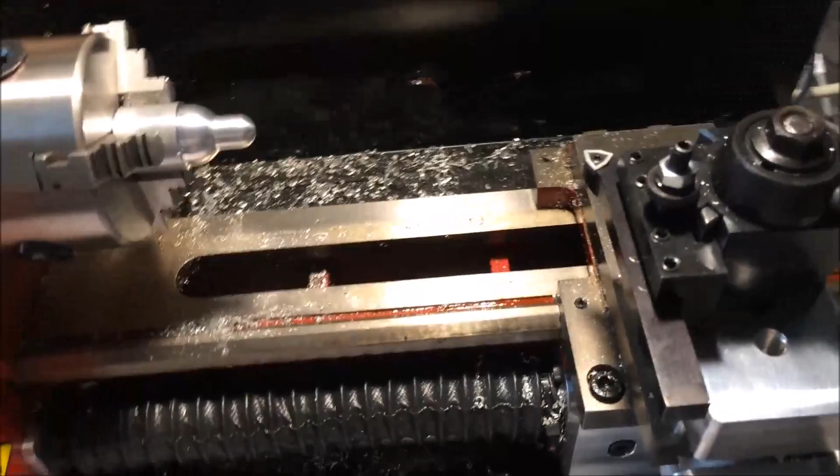Hey there YouTube. I thought I would shoot a quick video talking about how to touch off turning tools with Mach3. So very quickly, it's sort of a multi-step process. The first thing you've got to do obviously is physically load your tool into the holder. The second thing you have to do is find the center height of your tool. So the way I'm going to do that is to take a couple little test cuts here and just make sure the tool's on center.

Then, after that, what I like to do is, my cat is just, yeah, okay, that's okay, buddy, it's good.

After I find center, then the process I like to use, I like to touch off in Z on a common point of reference. So I use the face of the chuck here to touch off all the tools in Z. That way, no matter what I'm running, no matter what's loaded into the chuck, how far it's protruding, I can always touch off on a common point. Then all my tool touch offs are good for every job that I'm going to run. It doesn't matter what I put into the chuck. Those tool offsets, they all work.

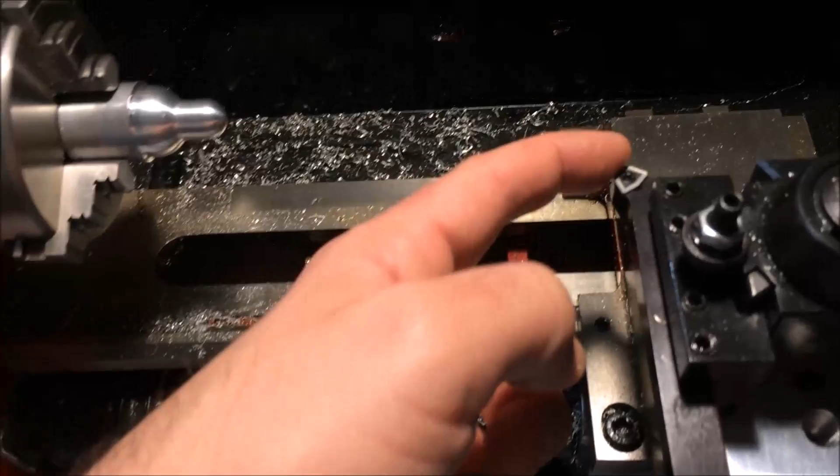X offset, very similar. The values you load into your X offset registers are the position that the axis has to travel to put the tip of the tool on the center line of the machine. So all your X offset registers are just that. It's the distance that the X axis has to position to in order to put the cutting tip on the center line of the machine.

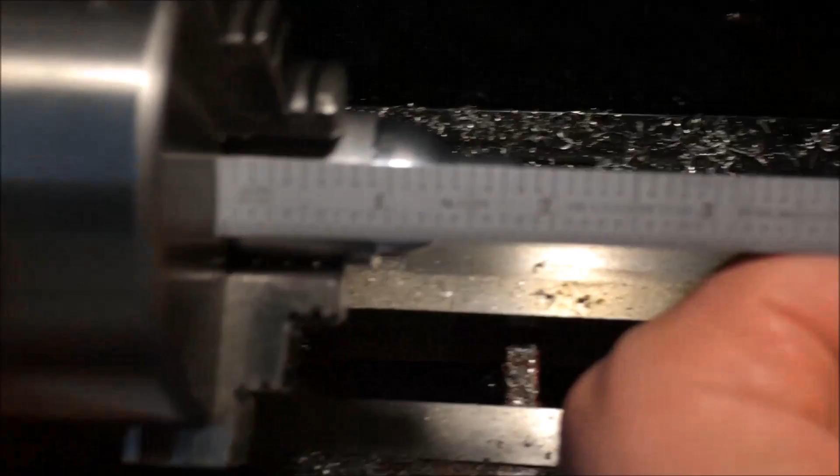Once you've done all that, your work offsets, or your fixture offsets, are really easy. You'll just bring up any tool, activate the offset, touch off the 0 point of your work and just tell it that that's 0. It becomes really super easy. Another way you can do it, if you know all your tools' Z0 is the face of this chuck, you can use the scale. For instance, if you want your 0 point to be 3 inches from the face of that chuck, then you literally can just load 3 inches to the fixture offset. So, long story short, there's a lot of benefits, I think, to touching off a common reference point.

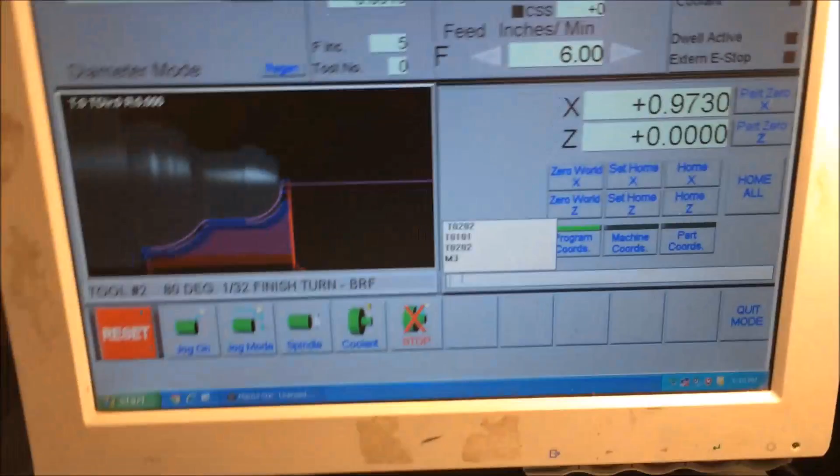So I'm going to go ahead and find the center height of this tool. I'm just going to take a couple quick test cuts, just like you would do on a manual lathe. Okay, so just jog this up there. Just going to fire off an M code here so I can see what my spindle RPM is. So I'm just going to give it an M3 just to tell it the spindle's on. So now I can see the spindle RPM, that's good. Going to jump into the jog wheel here, and I am going to slow down the feed rate to about 30%. So now everything's going to move nice and slow. So I'm just going to

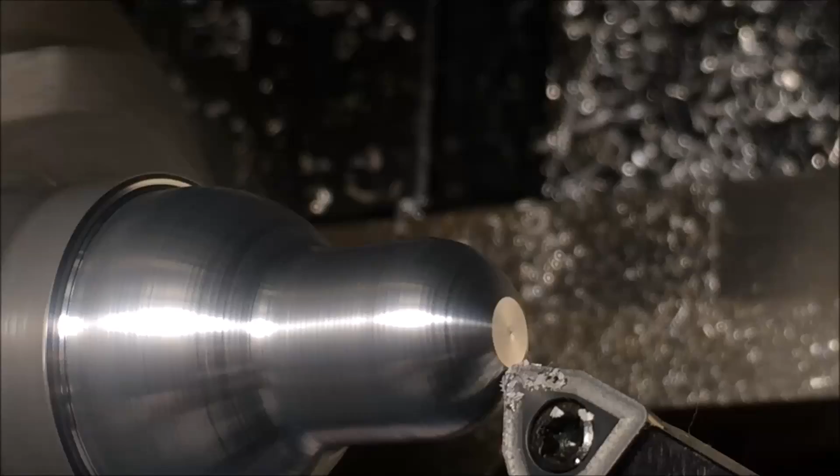I think my tool's a little bit above center, so I'm just going to adjust that and take another cut. Okay, so I think I have this tool fairly well placed on center, so I'm just going to take a little cut with it. Yep, that's pretty good. That tool's on center, and yeah, that'll work. Alright, now that the tool is on center, we can start the touch off process.

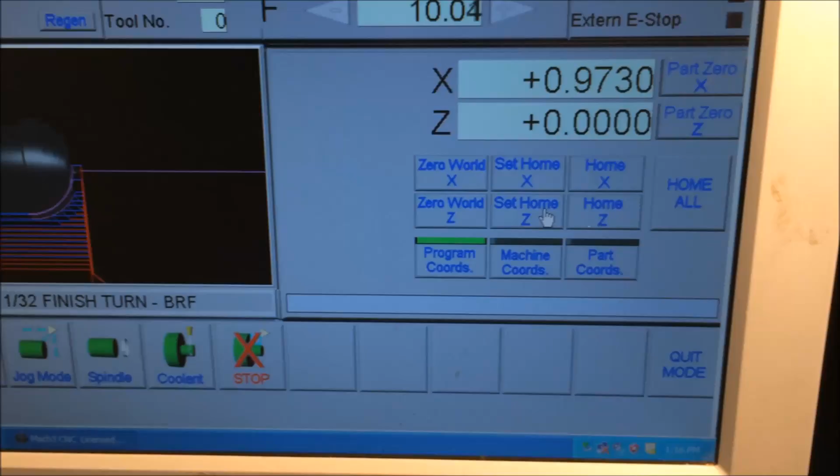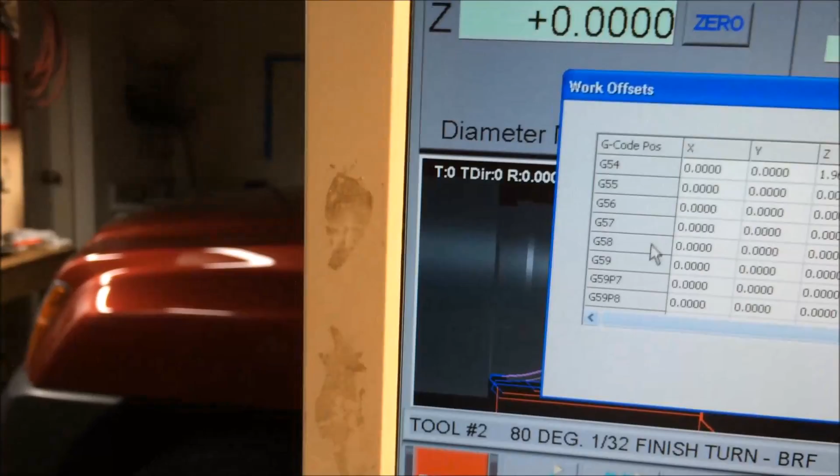So for good measure, I'm going to rehome my machine in X and Z, and make sure we're where we need to be to reference out all the axes. Alright, great. So we are at machine position 0, 0. So what I like to do is use G59 as a fixture offset for touching off, and G59 has no values loaded into it. So when I activate G59, it's basically going to be the machine coordinate system.

So what you have to do is first you need to let Mach know that G59 is active, and then you need to tell it which tool you're touching off. So I'm going to touch off T0202.

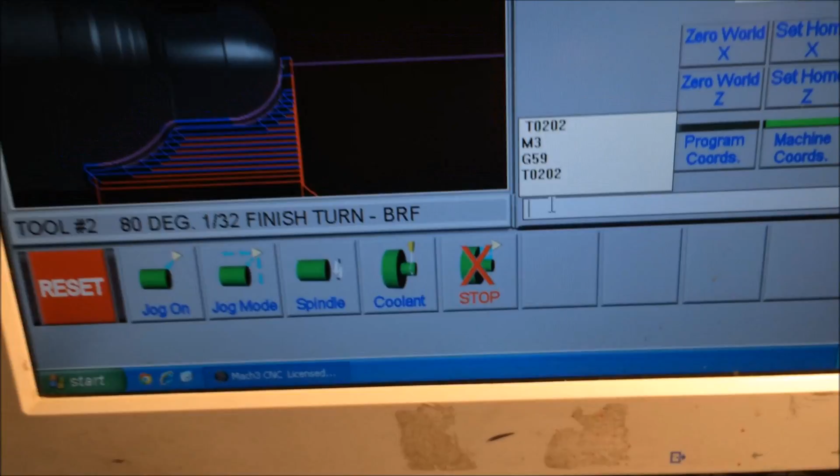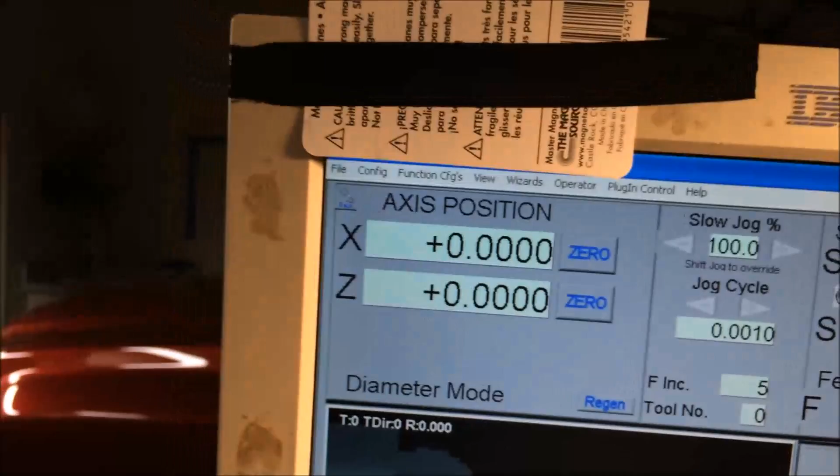So G59 is active and offset 2 is active, and when I go to program coordinate system, it still says 0, 0 because G59 has no values loaded into it and the tool offset has no values loaded into it. So that's right where you need to be. So now we're going to quit mode, and we're going to go to the tool table, and we'll get started.

One quick point that I forgot to mention: before you touch off any tools, you gotta make sure that you tell Mach which tool offset you're loading values into, and that's what you do right here.

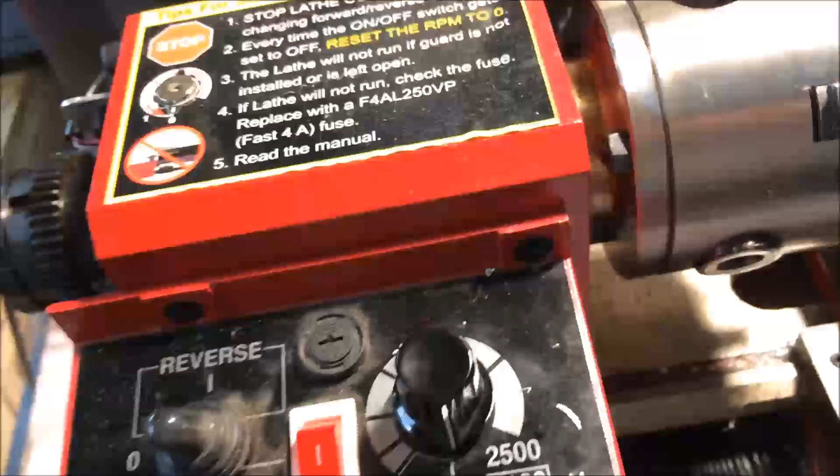Okay, so now I'm going to touch the tool off the face of the chuck, so I very carefully jogged it up here into position. I'm going to put it into the little jog mode, put it into step, and set the step to 10 thou. And whenever I do that, I always like to take a step in the opposite direction just to make sure I'm not going to crash.

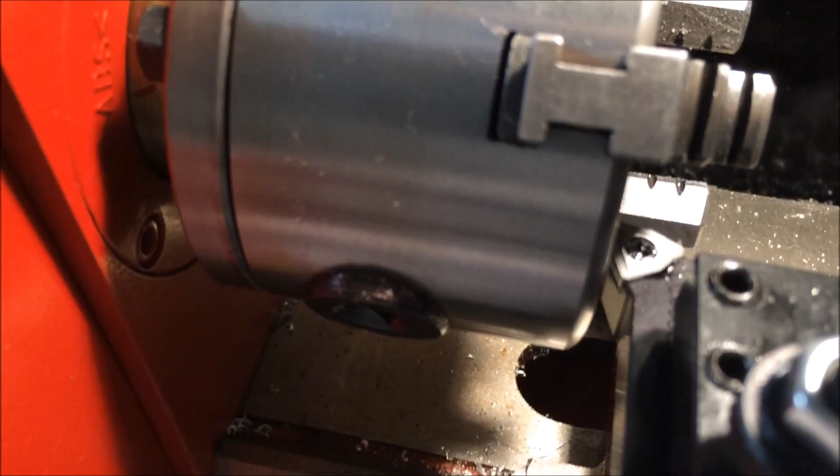So it's good. So now I'm going to very carefully bring this thing in a little closer to the face of the chuck, and hopefully not do any damage in the process. Okay. And now that I'm there, I'm going to go down to a smaller increment, 1 thou. Once again, I like to go opposite direction once just to make sure we're where we need to be.

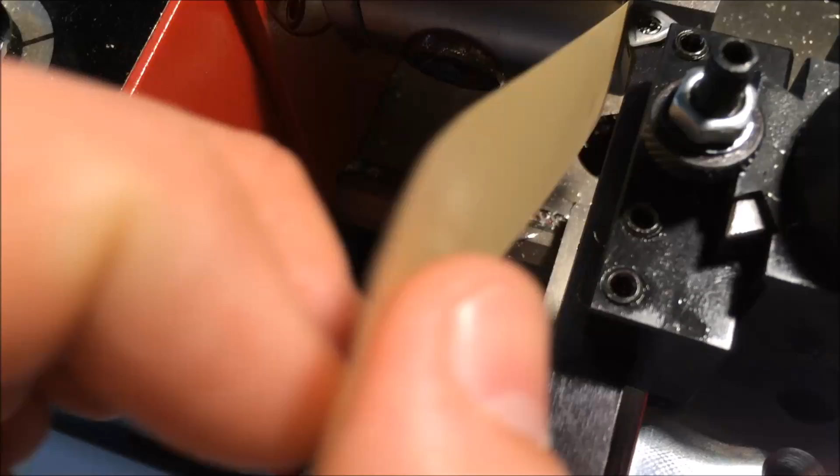Get it close, and basically what I'm going to do is I'm going to touch off with this 5 thou shim, until I know that I'm 5 thou away from that surface. So I'm just going to go put the phone down and do that right now.

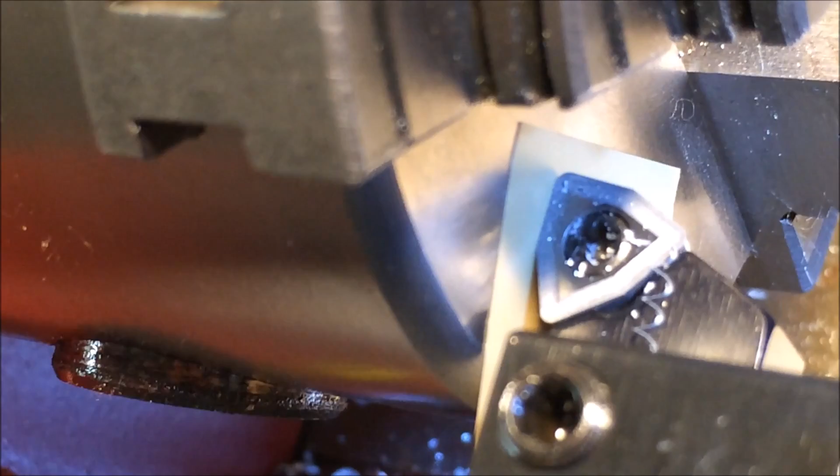Okay, so as you can see, I've very carefully jogged the machine until that 5 thou shim is just barely being held into place by the tool. So I can drag it, so there's still a little gap there. So I'm pretty close to being exactly 5 thou away from the reference point.

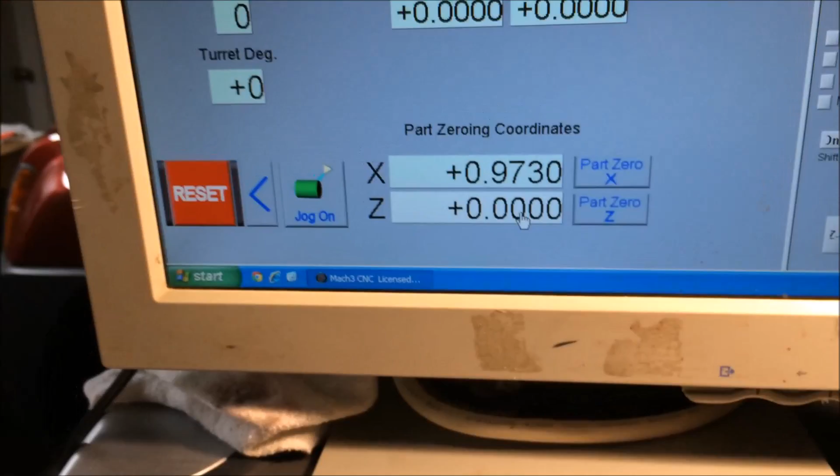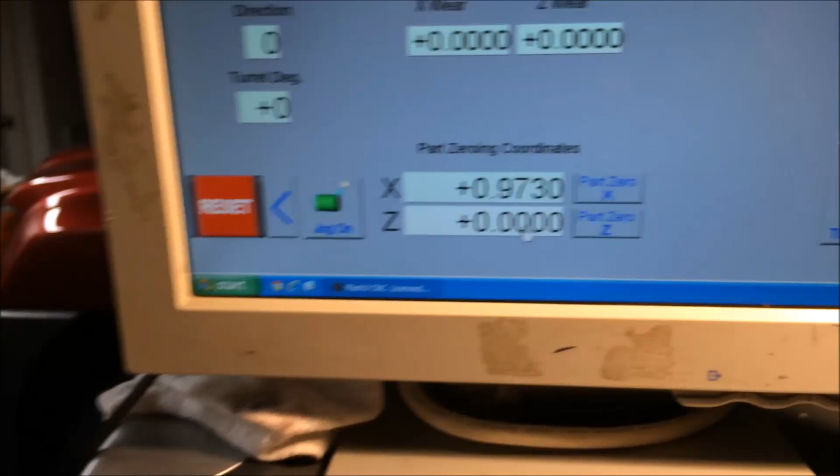So what I'm going to do is come up here to my part zeroing coordinate. What I want to do is load a value in here, 0.005. I've noticed for some reason Mach is glitchy. So if you have this situation where it won't let you load values there, what I've done is I've had to,

again, the cat is still crying.

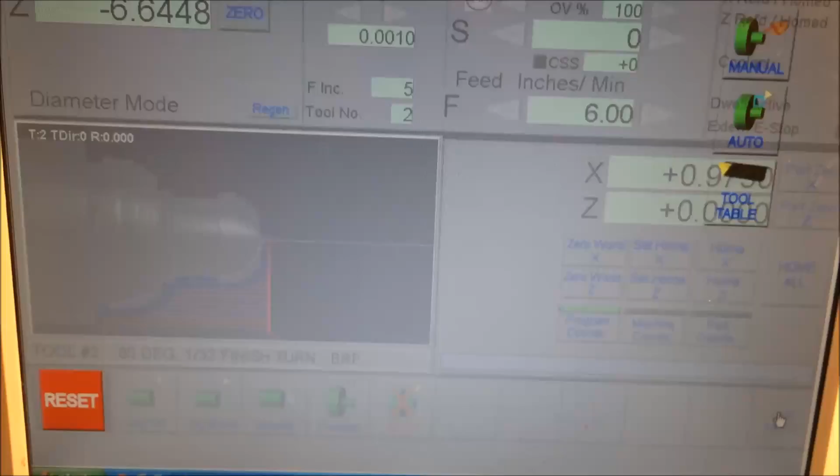What I have to do is quit mode, maybe go to manual, quit mode, go to auto, quit mode, go back to tool table, and 9 times out of 10 that cures the glitch. Now I can put 005 in there and press enter, and now when I hit touch Z, what that should do is load a value into the Z offset register.

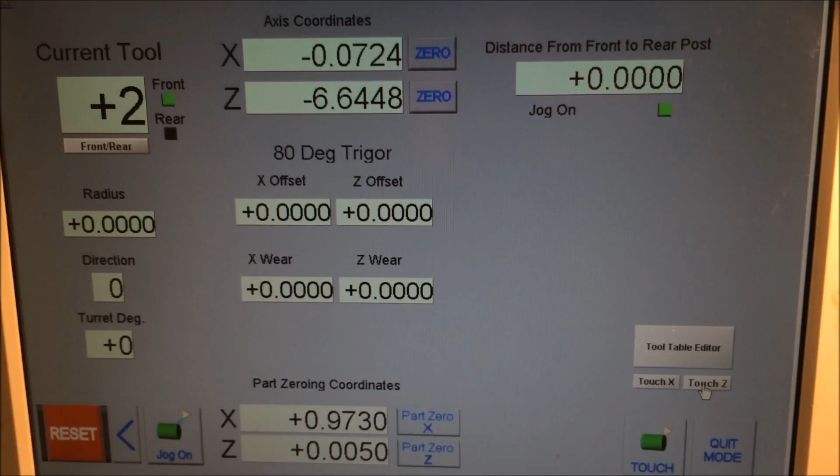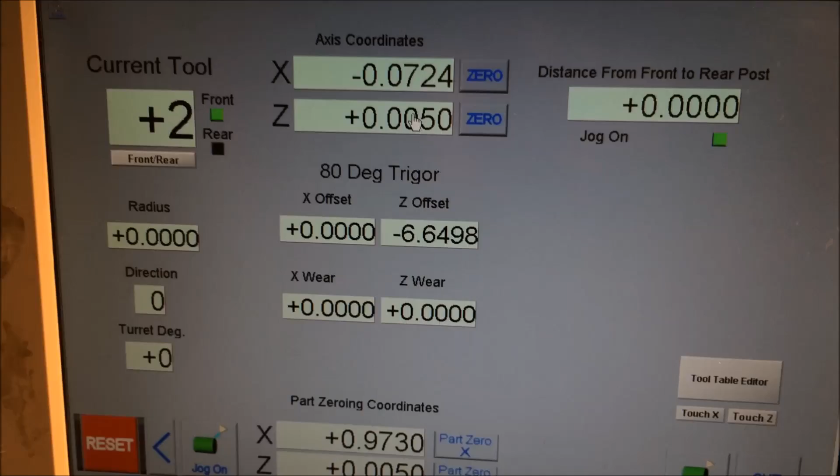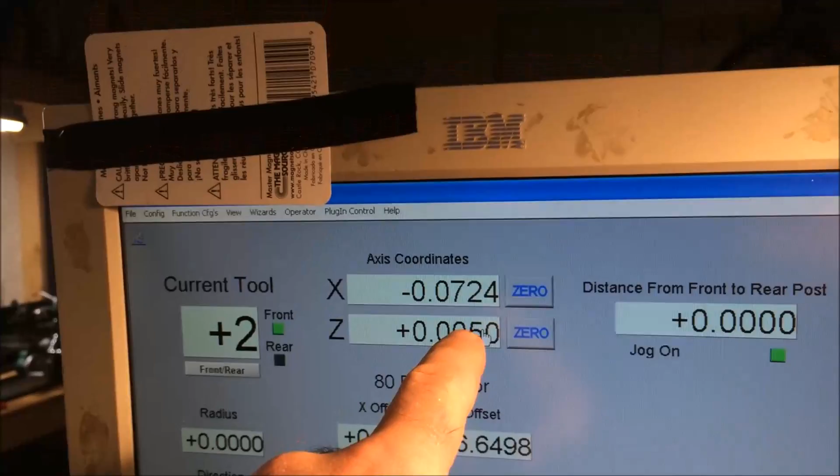So there you go. It just loaded a value into the Z offset, and now the machine thinks that it's at a position of 5 thou, which is exactly what you want. The G59 coordinate system is active, which had no values, and I just touched off that tool on a 5 thou shim. Told it that right here, and after it set the register, it now thinks it's at 5 thou. So that's perfect. So that worked just the way that I wanted it to.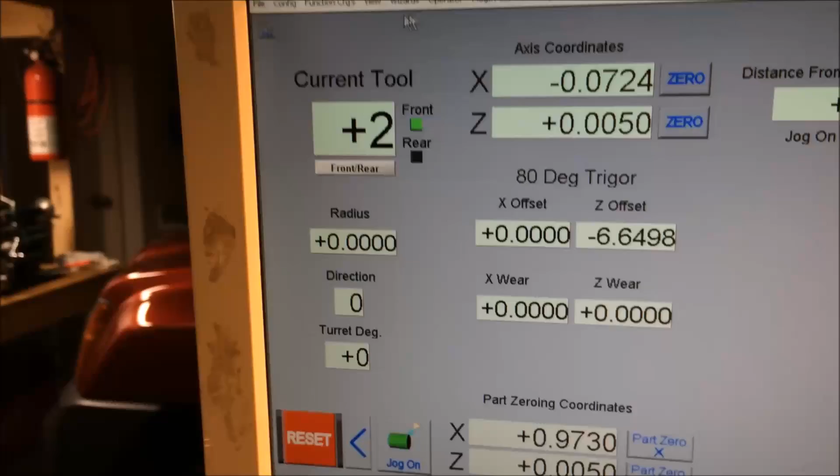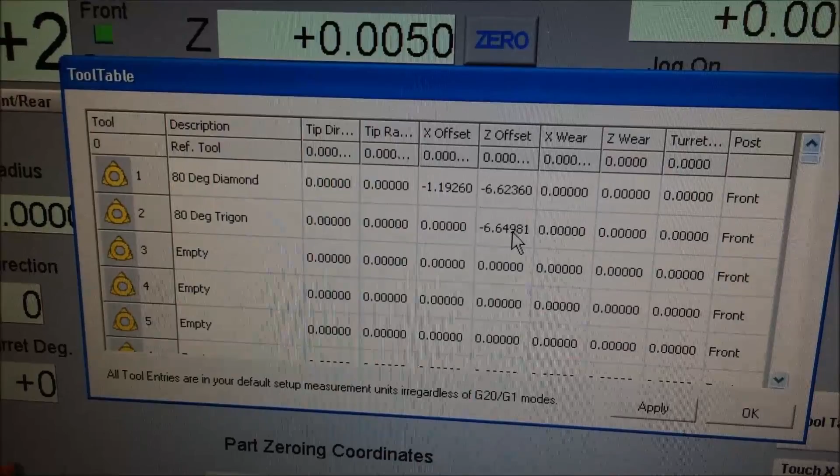So now if we go to our tool table, we have a value loaded in there for tool number 2 in the Z position. So that's exactly what we want. So the z-axis is touched off. So now we have to get the x-axis taken care of.

So the way that I'm going to do that is you basically need to touch off a known diameter. One way to do it, if the diameter of your chuck is a known diameter, you literally could come up and just touch off the diameter of the chuck, and that would get you pretty close. I have 2 positions here for my tool post. I don't have it set back far enough to get to the outside diameter of the chuck.

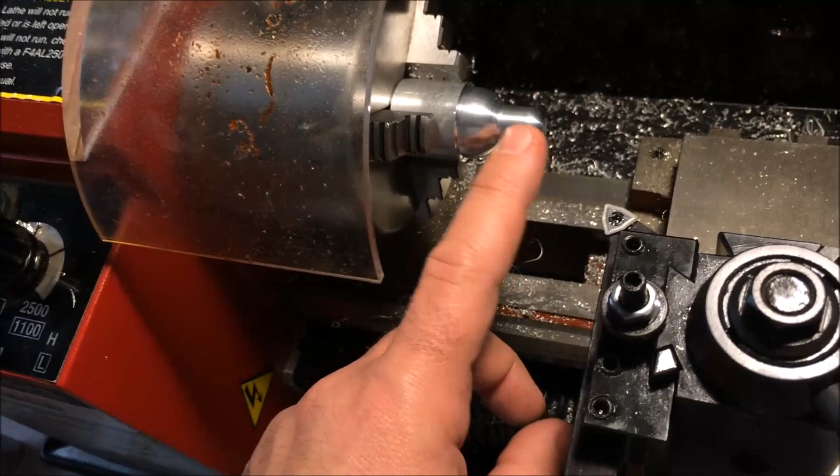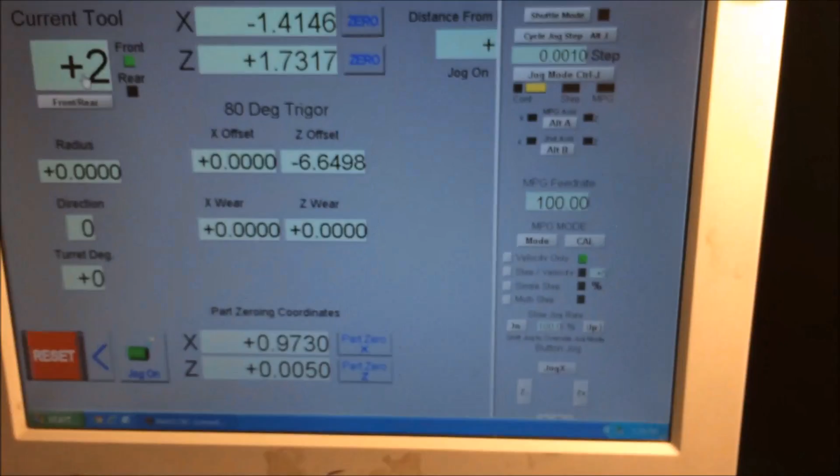So I'm going to take a test cut. I'm just going to very gently take a light cut on this little chunk of aluminum, and then I'm going to measure it, and then I will know exactly where the tip of that tool is. So I'm going to go ahead and take that test cut. So I'm going to press tab, bring up the jog window, whatever you want to call that.

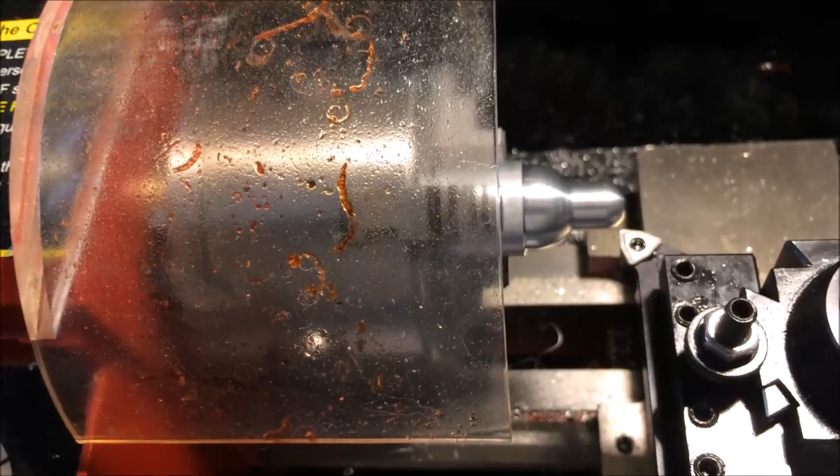And my x-axis is pretty slow on this machine, but my z-axis is fairly fast, or at least it's faster than the x-axis. So I'm going to slow down the feed rate quite a bit, to like 4.8. That's nice and slow. So that's going to let me take a test cut. So I'm going to fire up the spindle and come in here and take a test cut.

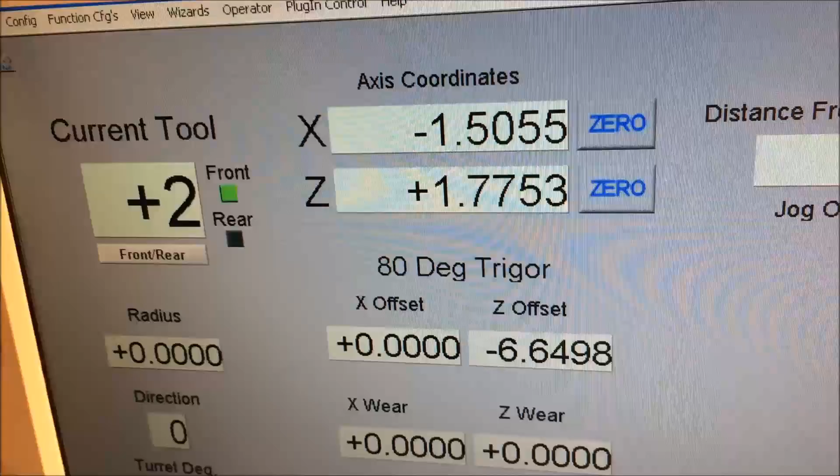I don't think I'm getting 100% clean up, so let me take one more pass here and try to get under the out of round. Okay, so it looks like I got clean up, and now I'm just going to leave the x-axis exactly where it's at.

Not moving the x-axis. I'm going to move the z-axis though, get the thing far enough out of the way so I can throw a mic on there and take a measurement. So let me grab my little micrometer and go ahead and do that. Okay, just taking a quick measurement. And it looks like I'm at 475, 85, 95, 96, 497. So, see if I can, there we go, one-handed, not good. So my test cut is at 497.

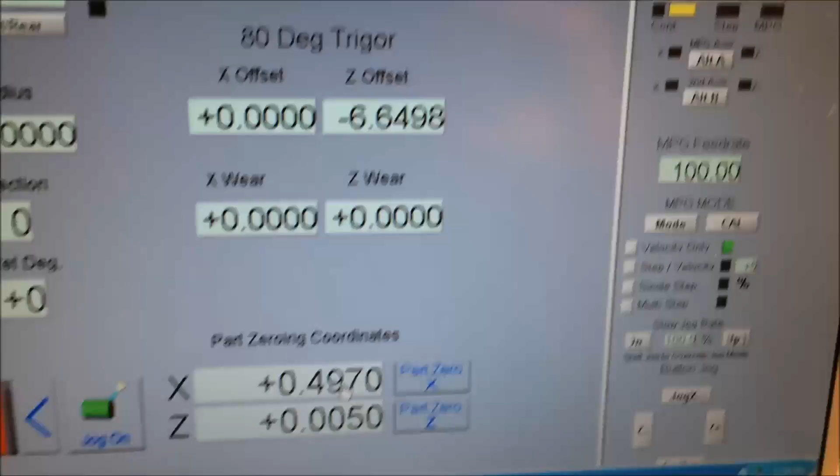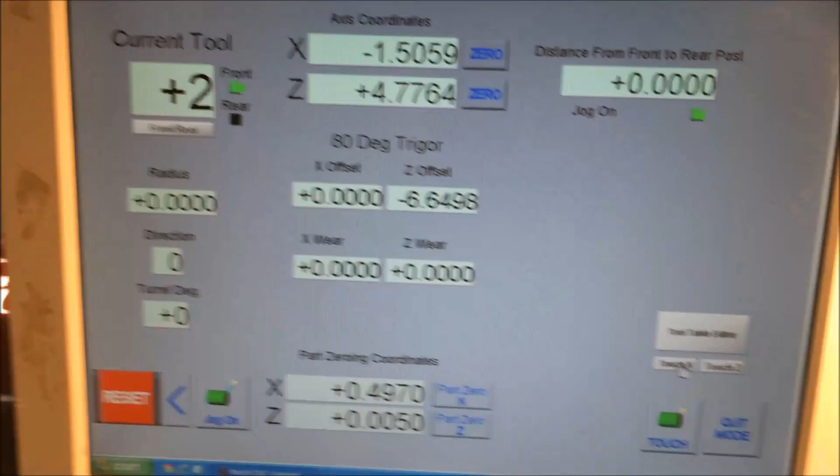So what I'm going to do is come here, and hopefully Mach isn't going to glitch out on me. And I'm going to tell it that I'm at 0.497. Press enter, and I'm going to get rid of this jog screen, and what I'm going to do is tell it to touch X. So when I hit this button, the touch X button, the number should change on the screen, and there we go.

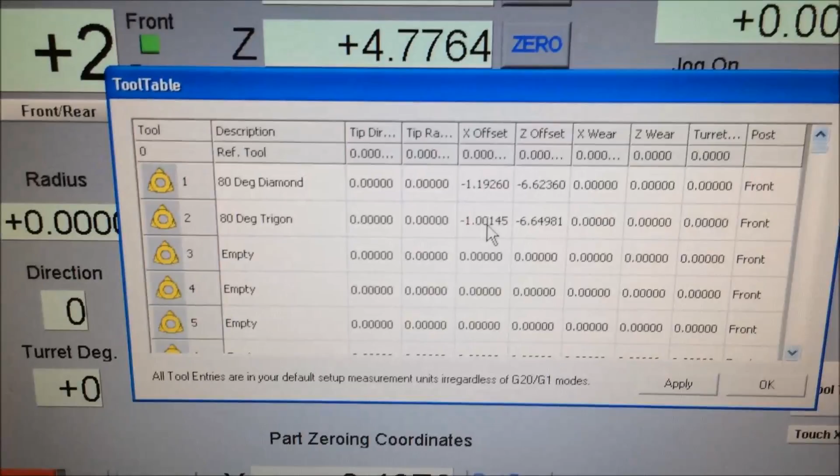So the value just got loaded into the offset that makes this tool tip here match up with this 497 diameter. So if I go to the tool table editor, you can see I have a number here, negative 1.00145, and what that is is the machine position of the x-axis that puts the tip of the tool at x0.

Okay, just to confirm the position of the x-axis, I'm going to MDI a move here. I'm actually going to tell it to rapid to x0. So you enter that command. So right now it's hard to see, but the tip of that insert is right in line with the center line of the machine. I can visually verify that.

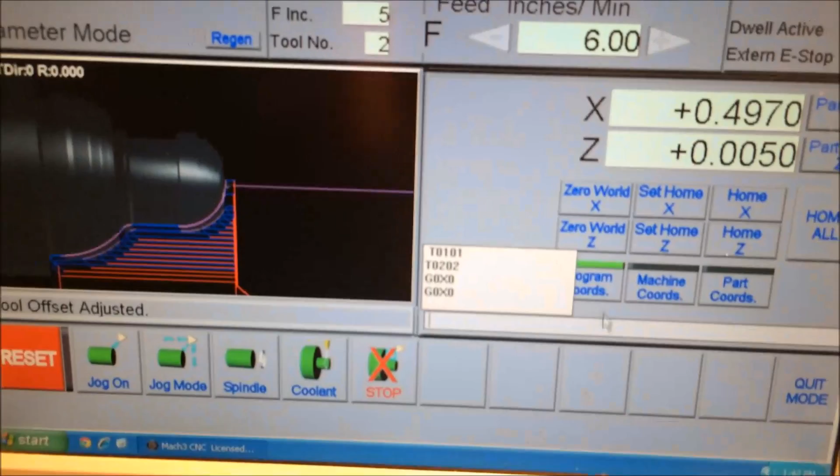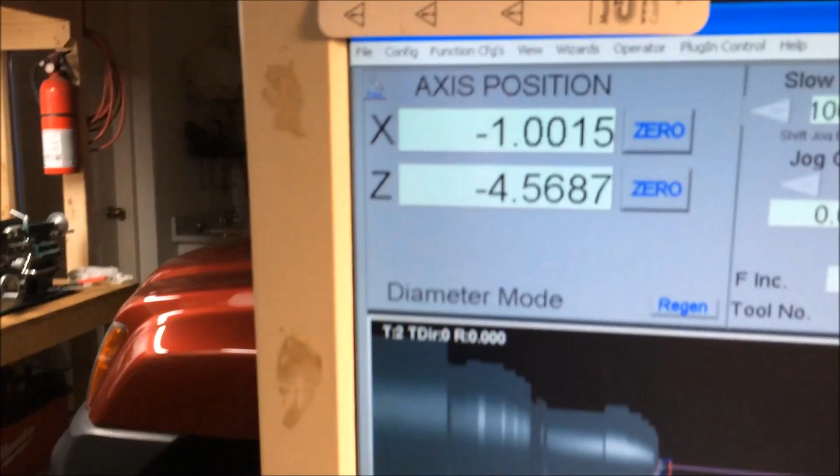And the program coordinate system says x0, and when I switch that to a machine coordinate system, the machine position is at negative 1.0015, which is exactly what matches the x-axis offset register. So the offsets hold the machine position that puts the tip of the tool on the center line of the machine for the x-axis. Okay, so now we double checked the x-axis.

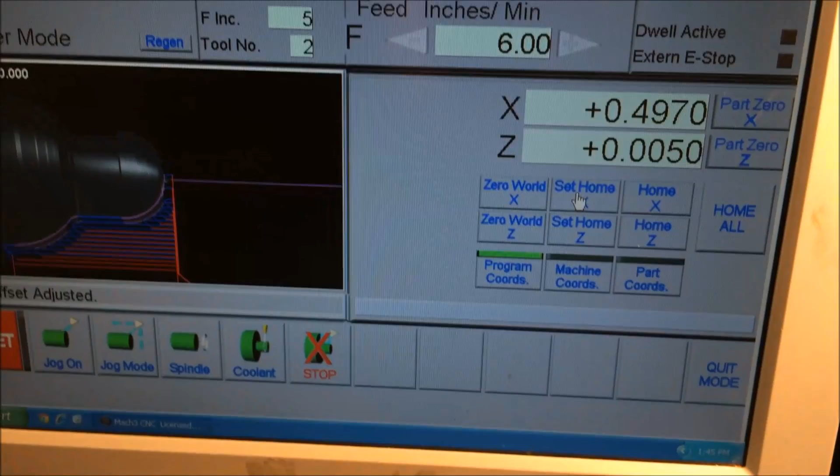Now I'm going to just do a quick verification on the z-axis. So I am going to home out my machine. I'm going to say set z home and set x home. We already verified x, doesn't really have anything to do with z, but so right now, if I hit machine coordinates, everything's at 0, exactly where we want it to be. If I hit program coordinates, right now G59 is active and tool offset number 2 is active. And what that's telling me is

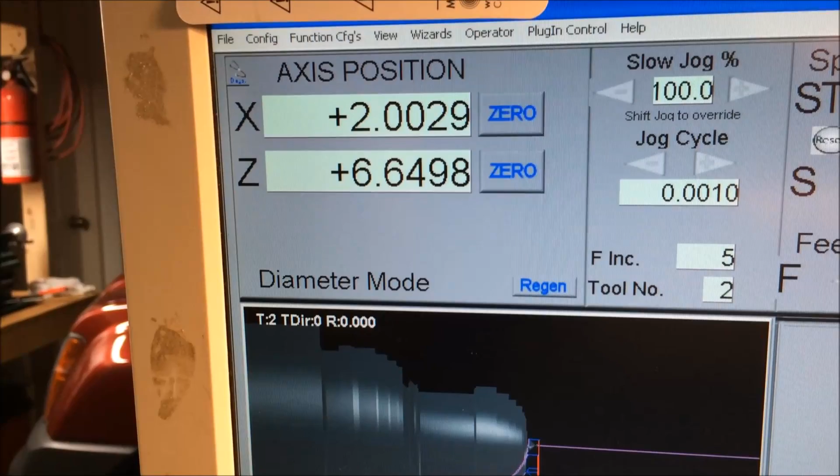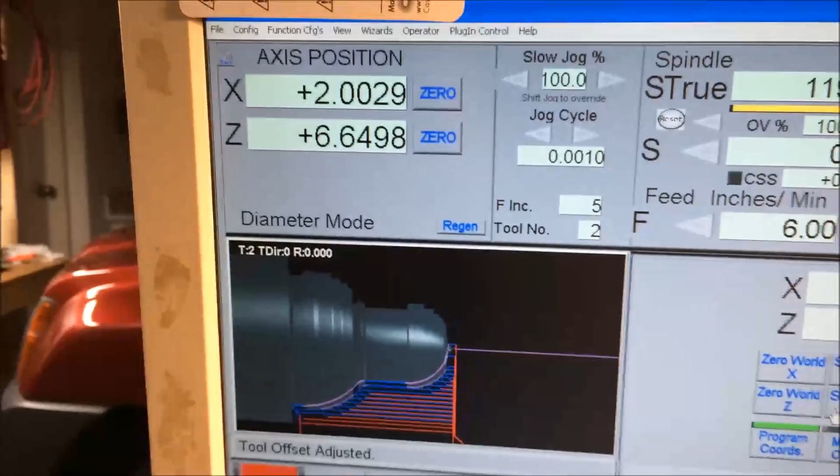right now the tip of the tool is at positive almost exactly 2 inches, 2.0029, and it's at positive z of 6.6498. So we want to double check the z. So that number in the z, 6.6498, matches exactly what's in the z-axis value for tool number 2, negative 6.6498.

So once again, the value for z is the distance away from home position to get to the reference point, which is the face of the chuck right here. So the tool offset value shifts 0 from the home position to here, negative 6.6498 inches.

So logically then, when I am at the machine home position 0, 0, and I activate the tool offset, the machine now thinks that it's exactly 6.6498 inches away from the point that I touched off on. And this is a 6-inch scale, so you get an idea. That's pretty much exactly where it is. So now you can touch off every tool that way, and no matter where your workpiece is, you'll always have a common reference point for all your tool touch-offs.

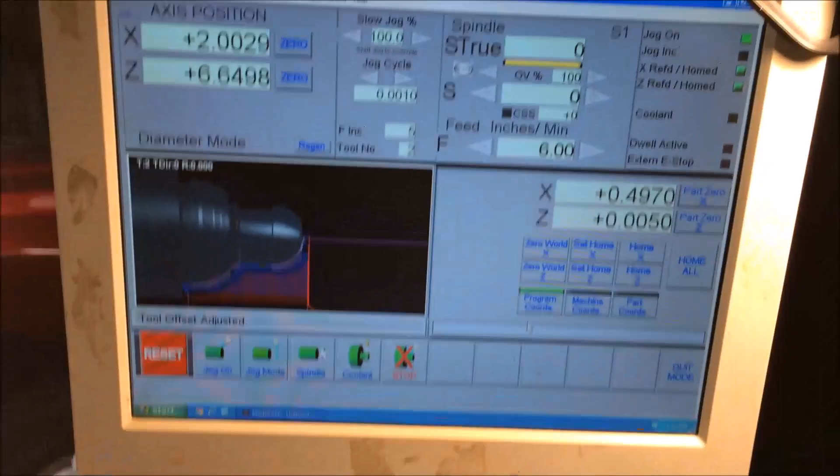So the next step will be to set your fixture offset. That's really easy. Okay, so all your tools are touched off, and it's time to set a fixture offset. First thing you want to do is MDI whichever fixture offset you want to touch off. You pretty much always want that to be G54 for all your lathe programs. So I'm going to activate G54. When I do, these numbers are going to change. So they just did, only in the Z.

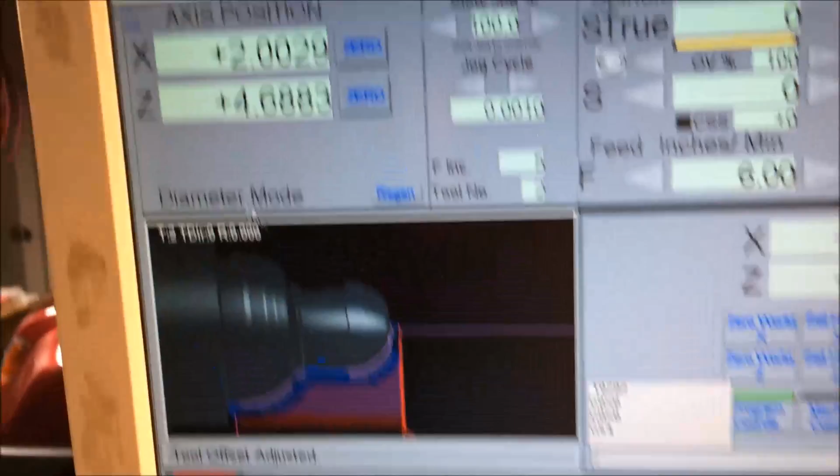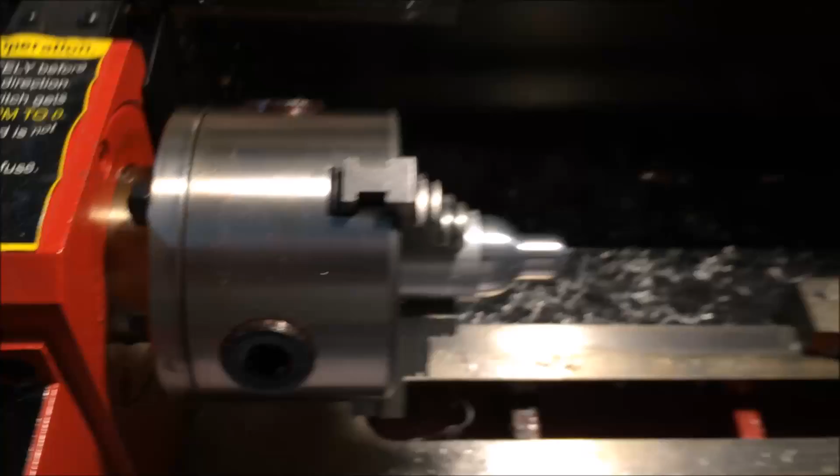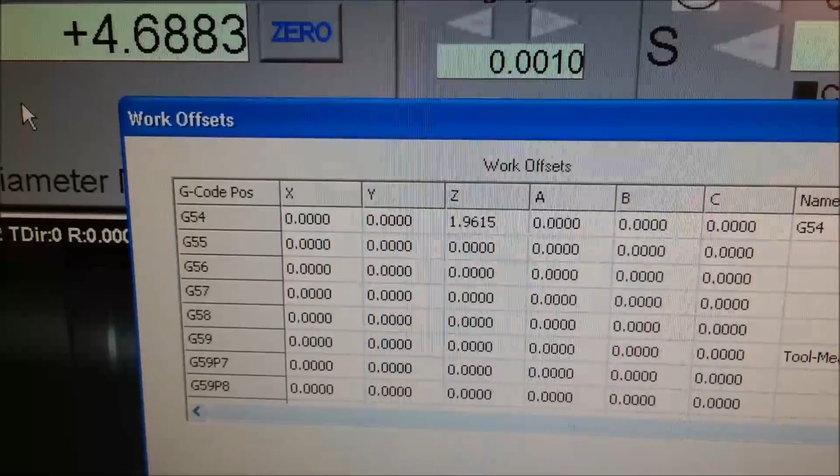And now we're going to load a value into G54's Z-axis. So let's just very quickly see what's there now. So right now, the 0 point for G54 is 1.9615. So currently it's set to almost 2 inches away from the face of the chuck. I am going to just pick a point in air and touch it off. Now, what's worth mentioning is there's no values in X for the fixture offsets. There really is no need to load any value in X for the fixture offsets ever.

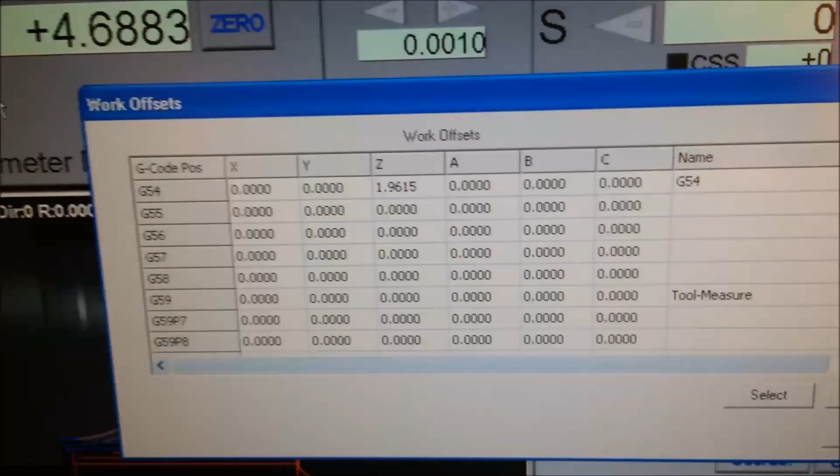X is all controlled by the tool offsets. If you need to adjust the diameter that a tool's cutting at, you're going to change the tool offsets. Really, there's no need to ever load a value in the X register for work offsets on a lathe.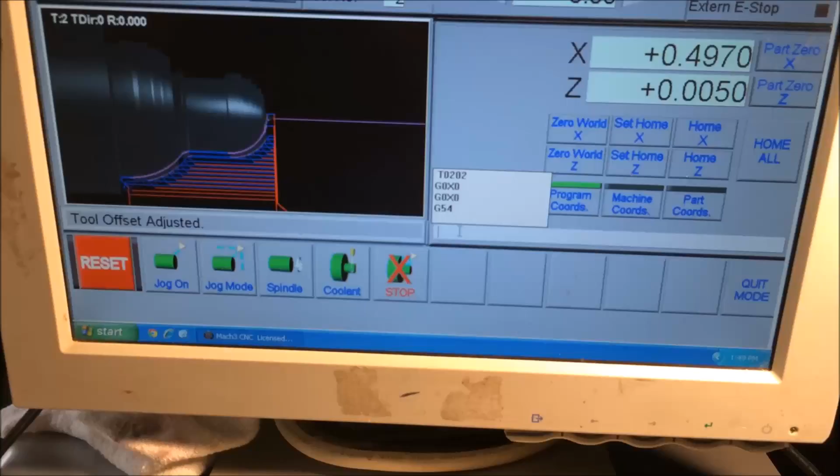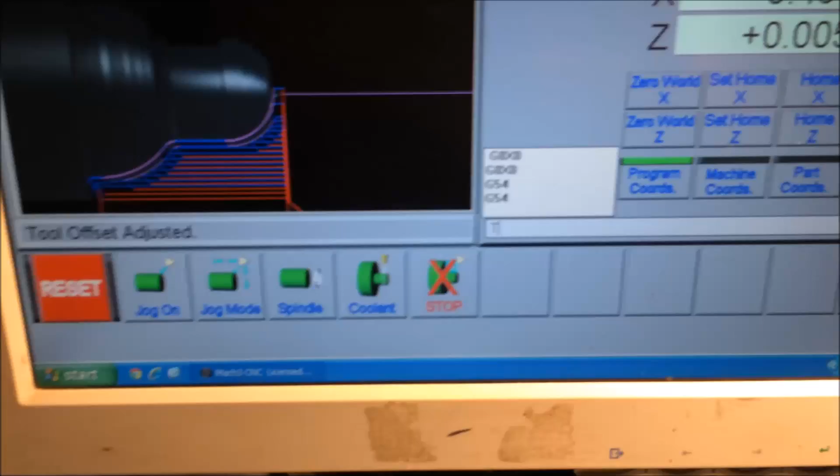Okay, so now I'm going to set the Z value for my work offset. So I'm on my manual screen. G54 is active, just to double check. G54 is active, and what I'm going to do is jog the tip of the tool. Oh, and also, just to be sure, tool 02 offset 2 active. And now I'm going to just jog the tool to some point. Let's just say right about there.

So I am, let's try to make it go out to 3, just to get close. So I am approximately pretty close to 3 inches, just a little bit less than 3 inches. So when I zero the tool out there, it's going to load a value into the fixture offset G54, and the Z value, it's approximately 3 inches.

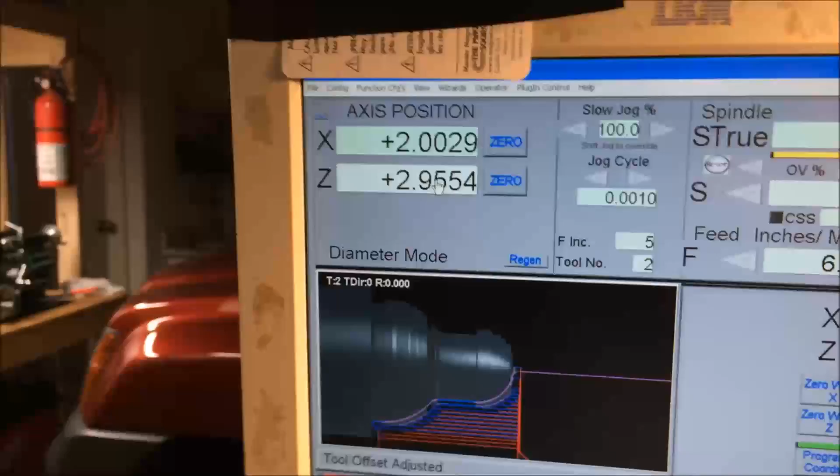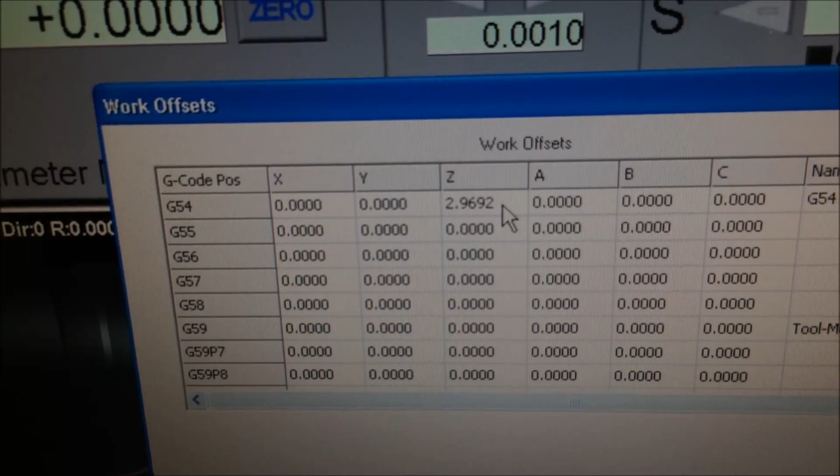So on the manual screen, I'm just going to click on the Z value. I'm going to say you are now at 0, and enter. So now the machine thinks where the tip of the tool is right now is 0. And when I go to my fixture offset page for G54, you can see that it loaded a value. The tip of that point is exactly 2.9692 inches away from the face of the chuck. So that's my 0 point.

So that's it. When I run my program, it's going to work to that point. It's going to use that as my Z0. And touching off the face of the chuck makes it really easy. So, like I said, if you want to eyeball it, you can just measure it. So my part's a little bit less than 2 inches. So let's just say I want to set Z0,

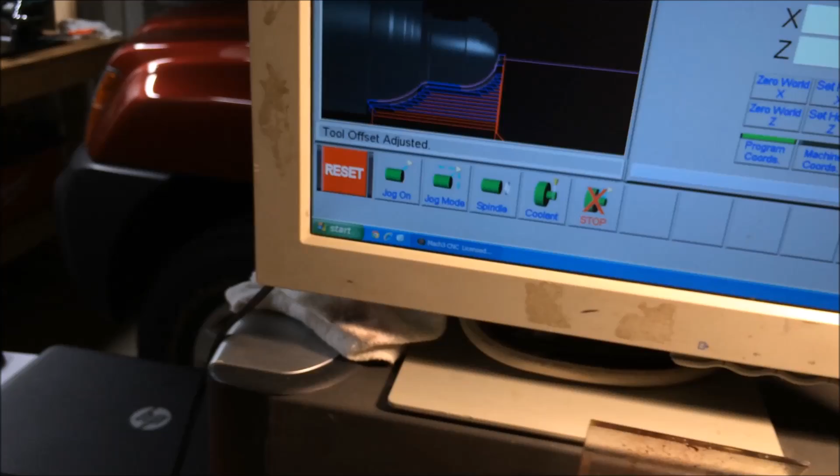2 inches. So I'm just going to go into config, fixture, and say I want Z0 to be 2 inches, right on the money. Press enter, and save, and close. Now, if I MDI, let me just reactivate that offset. I'm going to say G54. Now it just changed. So now it thinks the tip of the tool is at 0.7898 away from the Z0 point.

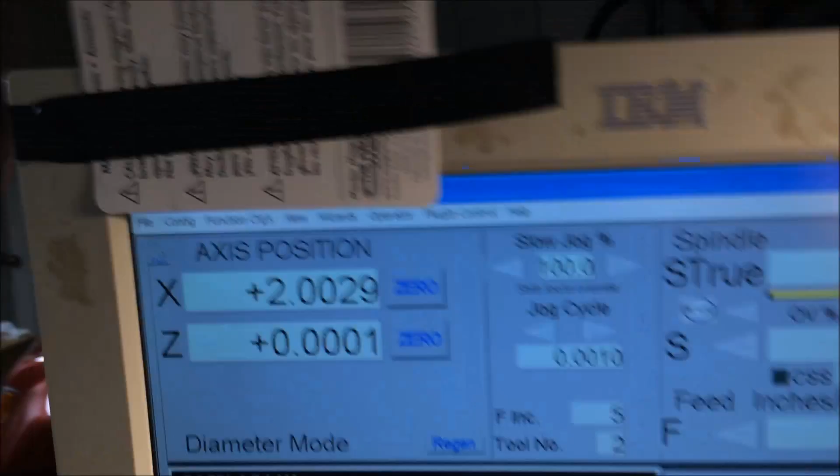So if I MDI G0 Z0, put the tip of the tool at 0, it should be precisely exactly 2 inches. So there you go. That's how you touch off tools and then set your fixture offsets.

Okay, so I thought maybe I better do one more thing just to make things really clear. So I'm going to physically touch off this little slug here, this little blank from my program that I'm running. So just like we touched off the chuck, I'm going to bring the tool over, and get as close as I can without crashing the tool into the work.

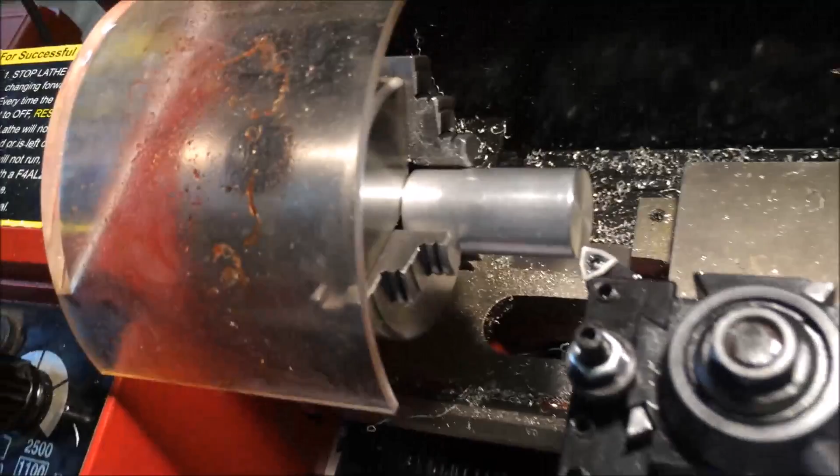And what I'm going to do is jog the tool with the spindle on until it just scratches the face of the part, and then I'm going to tell it that I am not at 0. I'm going to tell it that I'm actually 5 thou in front of 0, positive. That way it's going to leave 5 thou to face off. So I'm just going to go ahead and do that right now so you can see.

Okay, so the spindle's on. Just going to jump into a mode here and slow my jog down to a nice safe rate. And here we go. All right. Probably hit that a little harder than I wanted to, but working one-handed here.

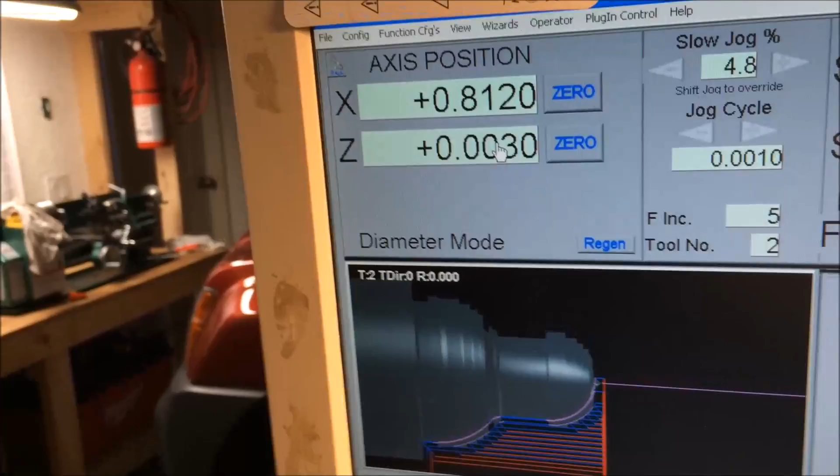So what I'm going to do now is come up here. I'm going to tell it, you are now at 0.005. We'll say 3 because I cut a little bit. 0.003, enter. Now the machine thinks that that position is positive 0.003. So when I go to 0, I'm definitely going to face a little bit off. So, all right, there you go. Now I am ready to machine my part.